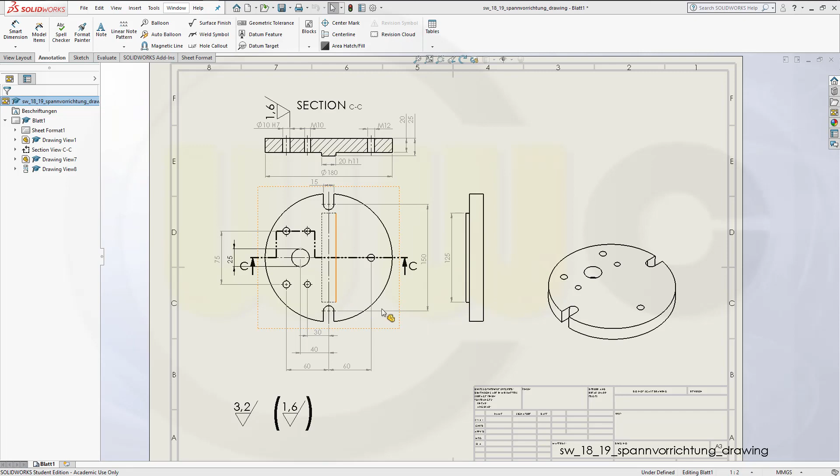So let's start with our assembly and go to File and Make Drawing from Assembly. Select Drawing, go for A3 and OK. Now I've got a front view. I could drag this here, but I will get problems if I later want to add a projected view - it will not be aligned, so I'll do it a different way.

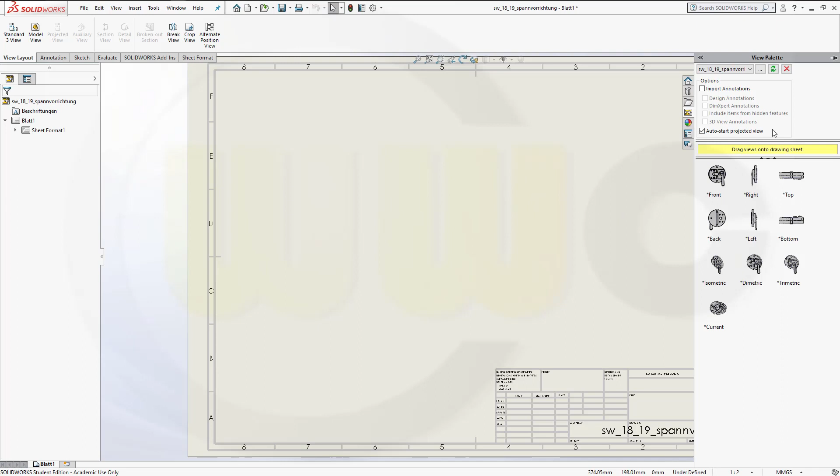I will just close this and go to Model View, browse to my assembly, open it and put it right there. Okay, and then I see the projection angle is wrong, so just confirm.

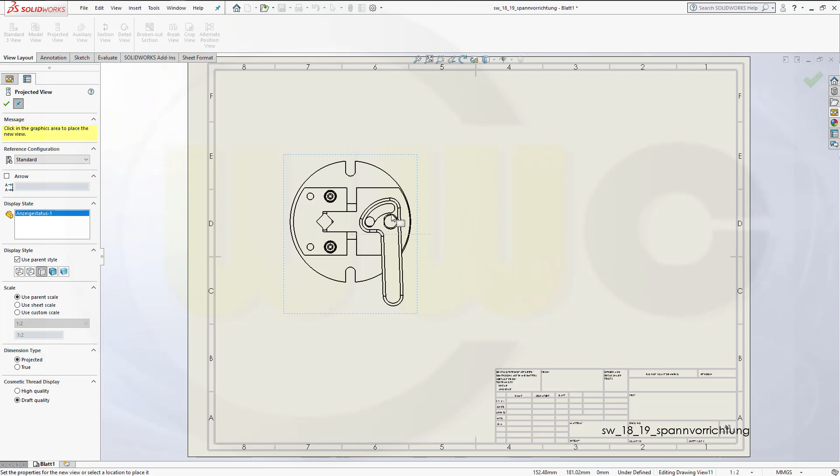Go to sheet format, right click, go to properties and switch from third to first angle, apply changes. Now if I go for projected view, it's aligned and it's okay.

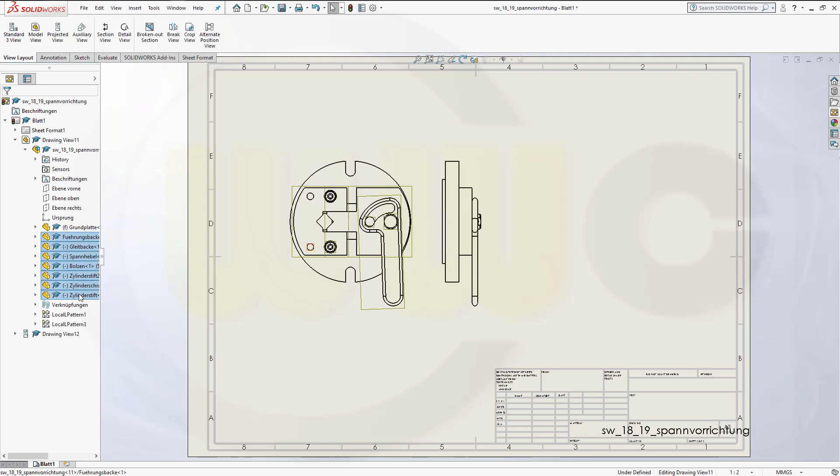Now in order to just see the ground plate, go to drawing view 11 and just hide those components, including, of course, those pattern ones. Same for the second one - hide these, and here as well.

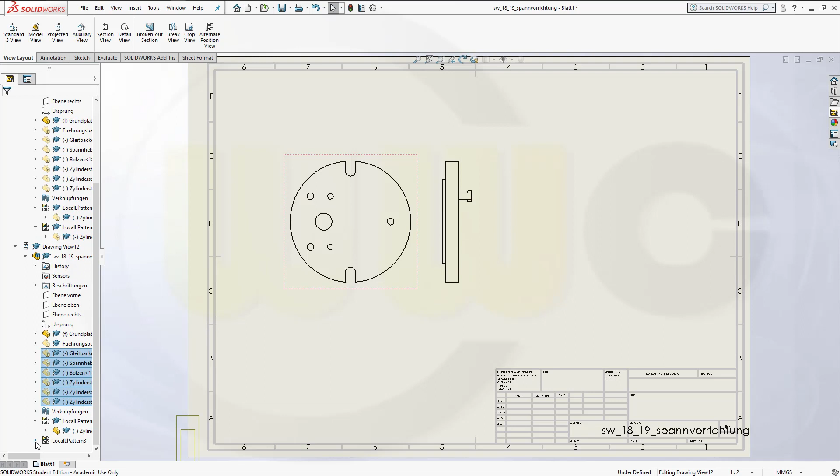Hide components. Great. I will need an ISO view and I want to have a section view. Maybe let's start with that ISO view, so go to Model View.

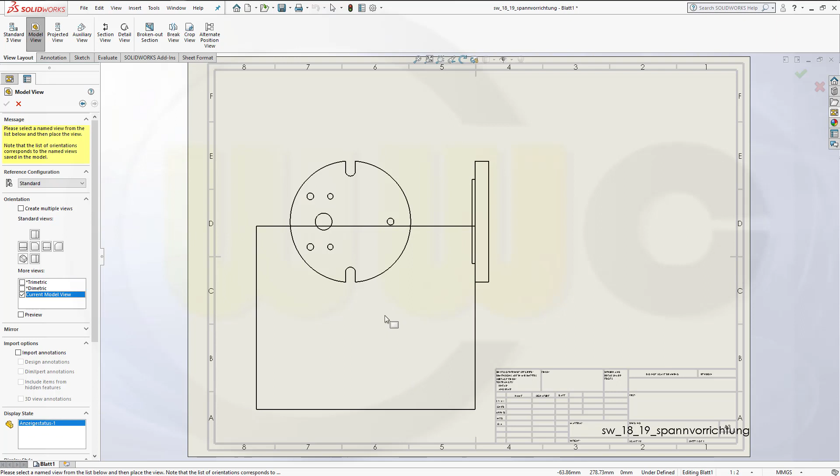That should be, or is it? No, go to Browse, go to your Assembly, open, and I want an isometric or current model view. Let's see, what's my current model view? I'll go for trimetric, go for preview. No, the current model view would be, that's more like it.

Yeah, okay, and confirm. Now again, just hide all those components you don't want to see. Of course, you could hide those components in the assembly as well. Right click, show hide, hide component, and I got my ISO view.

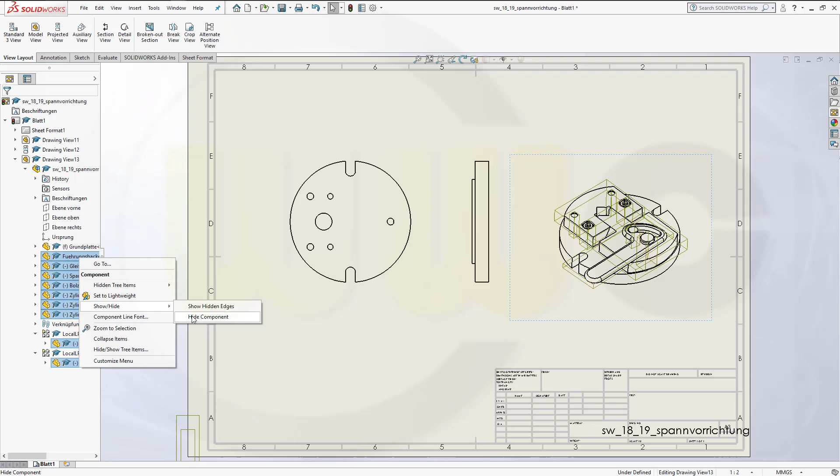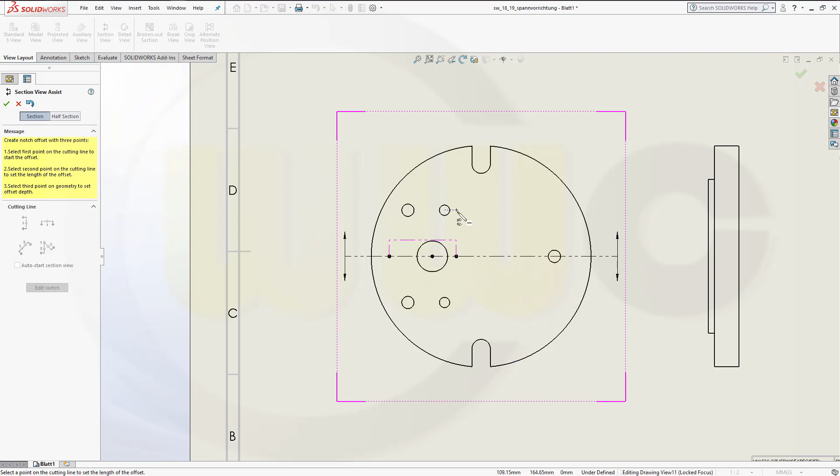Now for my section view, I need section view. So zoom in and go for horizontal, select one center point, then go for notch offset, like this and like that, and then put it right there, confirm. Let's go for auto hatching and OK, and move it up there and confirm.

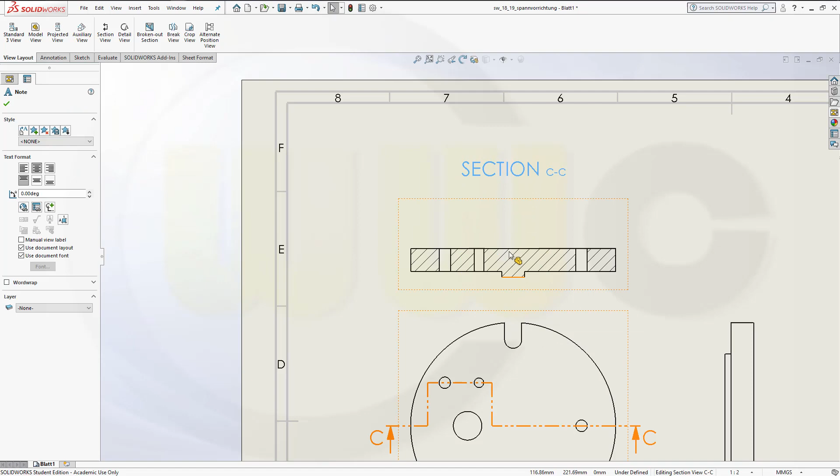Now let's move this up and this one up as well, maybe like that. Let's take a look here, should be okay.

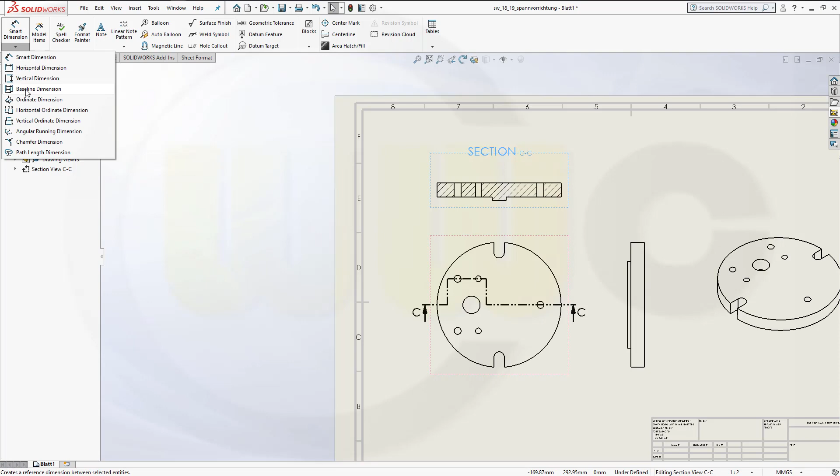Now for my dimensions, go to annotations and go to Smart Dimension, or you could go for a baseline dimension, and this should go from that center point to this center point, that center point, and this center point, but that didn't work out.

So let's undo this and make first center marks - one here, one there, here, here, here, here, over there, and there. Confirm, and now go for baseline dimension.

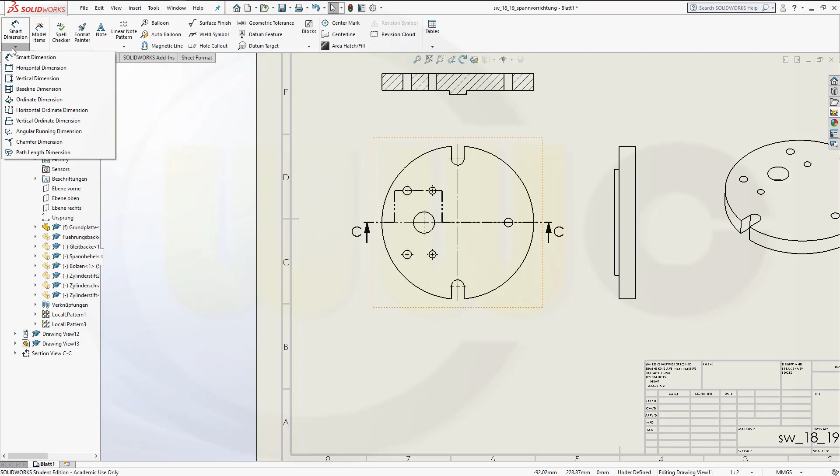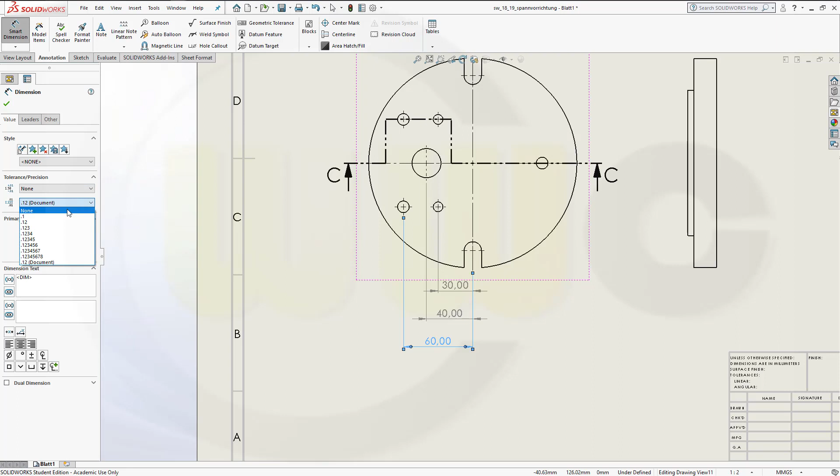Now you could maybe select this one, that one, this one, that one, and I don't want these, and that's kind of odd. You have to do it separately for those as well.

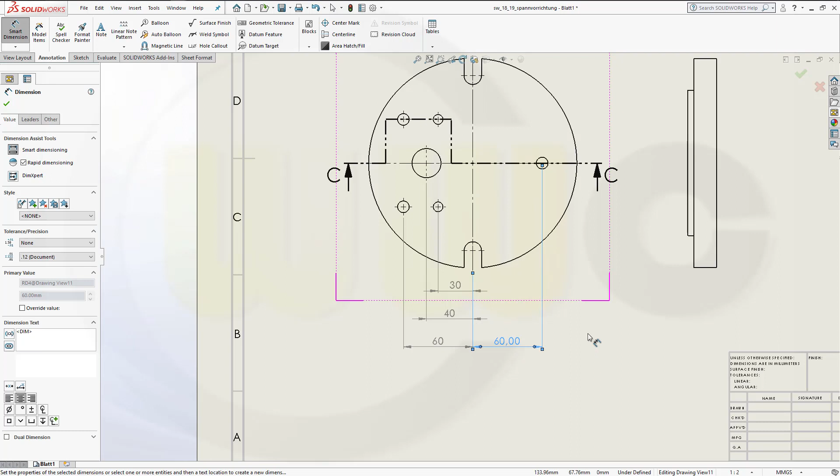Next one would be from this one to that one. Let's align it like this. Okay. I need one dimension from this circle to that circle, that one. And let's make this one over here as well, from this line to that line, like that.

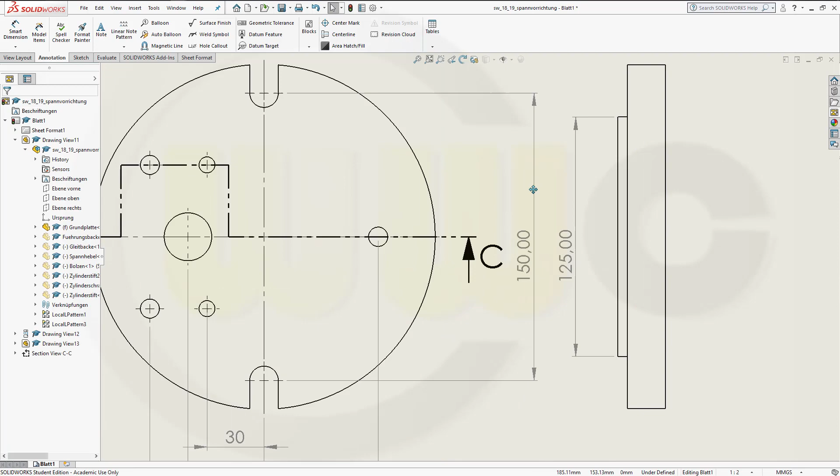Now let's see if we can do them all together. Okay, and change to 0. That works. And move it over here.

Next dimension is from this circle to that circle, that's 75. And again, none. And it will always be dragged back. Now you see you could align those. It snaps. Okay.

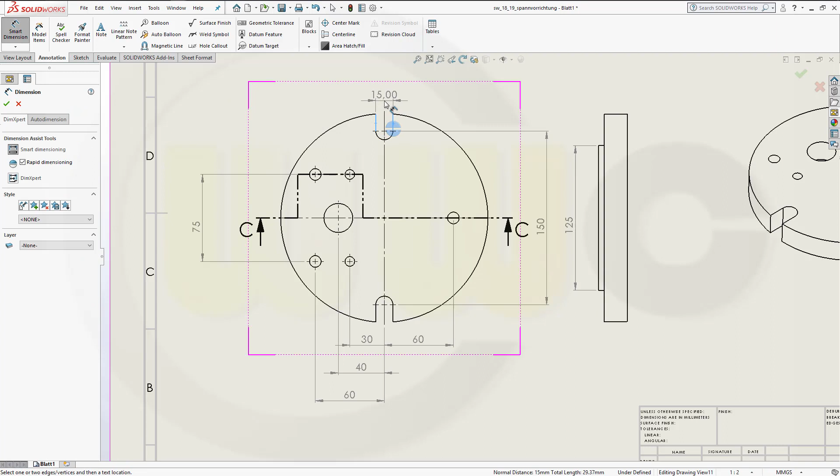Now another one here, 15, again it's just with no precision, more than 0. So next one would be this one, and if you drag it like this, you get it vertical aligned, and again precision none. Okay, let's drag this over here.

Let's take a look. Oh, hidden lines are missing here, so let's go for hidden lines. Not here, but select the view and go for hidden lines visible.

So these are without. Don't use parent style. Go for this one, and same here. Don't use parent style, but this one.

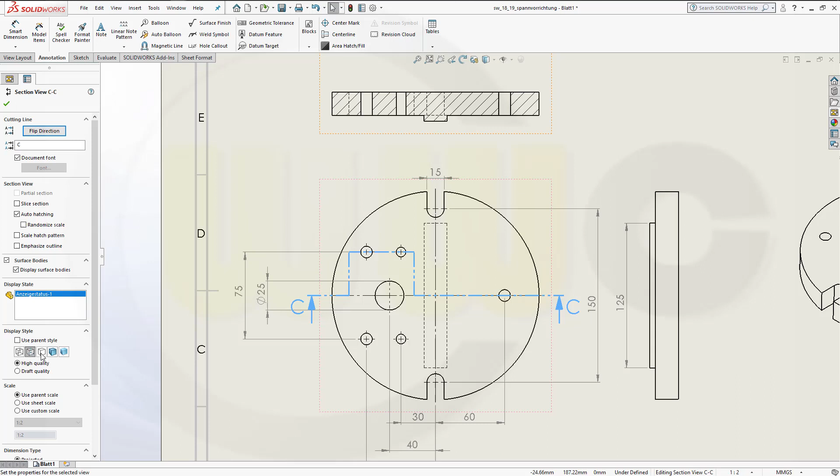Okay, I need a center line here, so go for center line like this, and too many center lines. I need only that one in the middle.

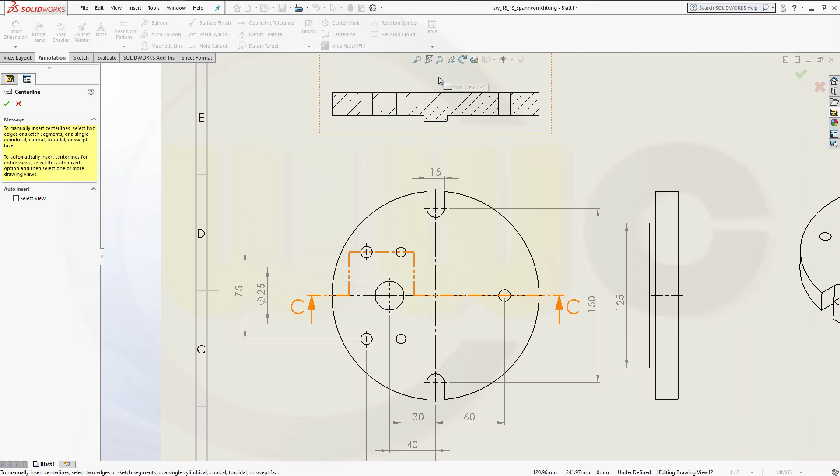Center line here, that's okay, and remove this one.

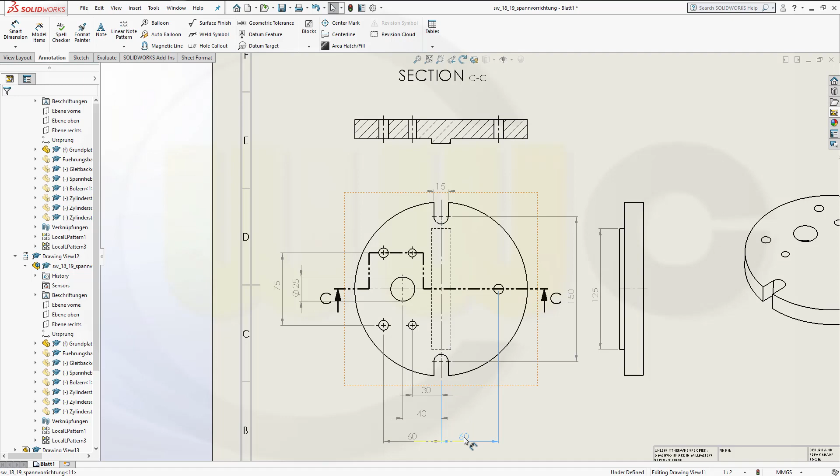So what's next? The one 150. I got this one. I got those. Let's move this back down. That's kind of odd because it always jumps and refreshes somehow.

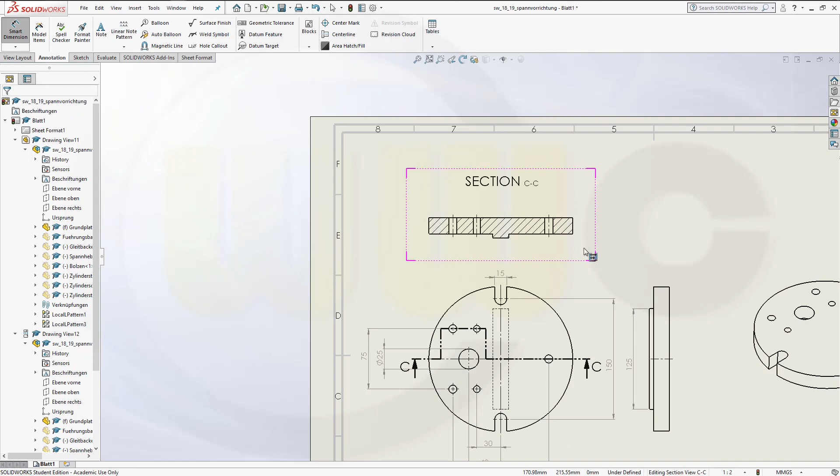Now smart dimension, or let's say baseline dimension. Zoom in from this line to that line to this one, and that's really annoying.

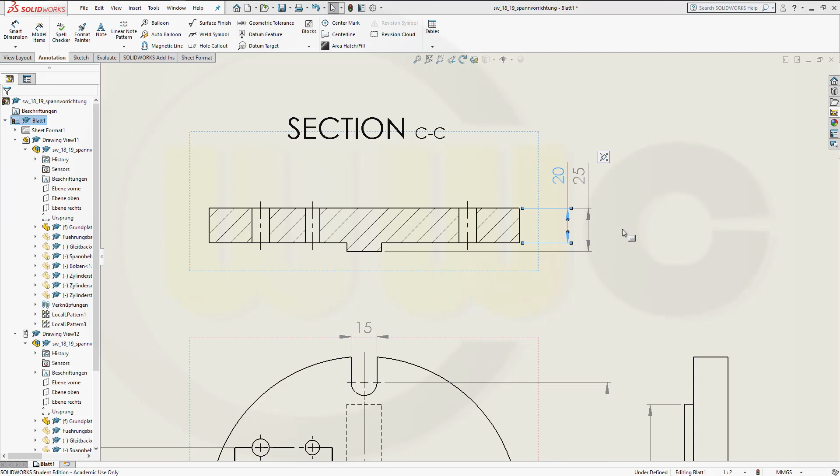So, 0, move this up, move that one up as well. Okay, another one here.

And there I would need a symbol, so click here, go for diameter, and again not the document precision but 0.

I need one here, and there I would need a fake one here and a fake one there, because there are no threads, since that part wasn't modeled with SolidWorks.

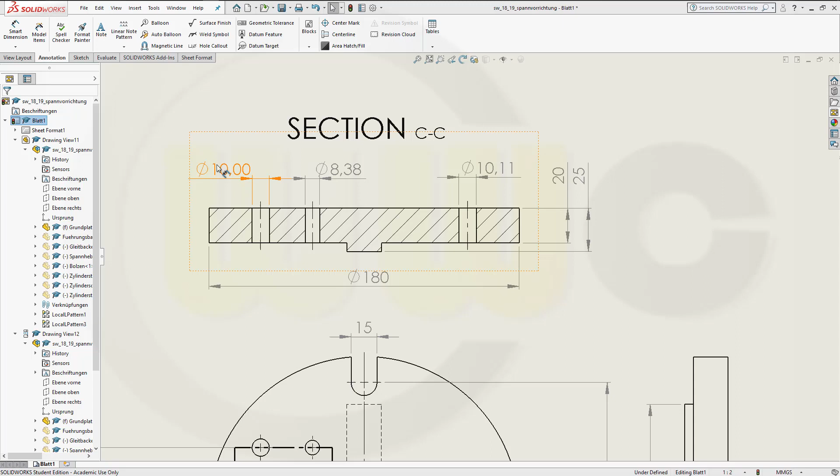Now here I need a fit, so go to fit, and that one would be, yeah, H7.

Okay, but it should be aligned like this.

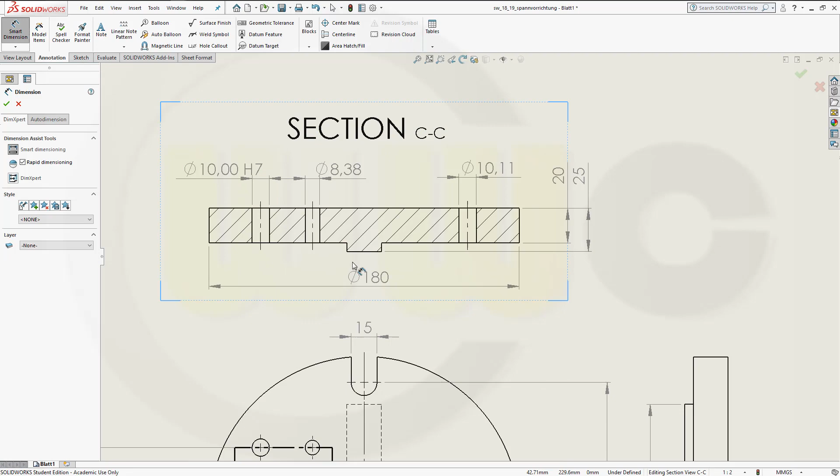We'll need another one here, so go there, put it here, and again precision should be none, and I will need another fit. In this case I think it's that one, and I should go for H11.

Okay, and again like this. Nice.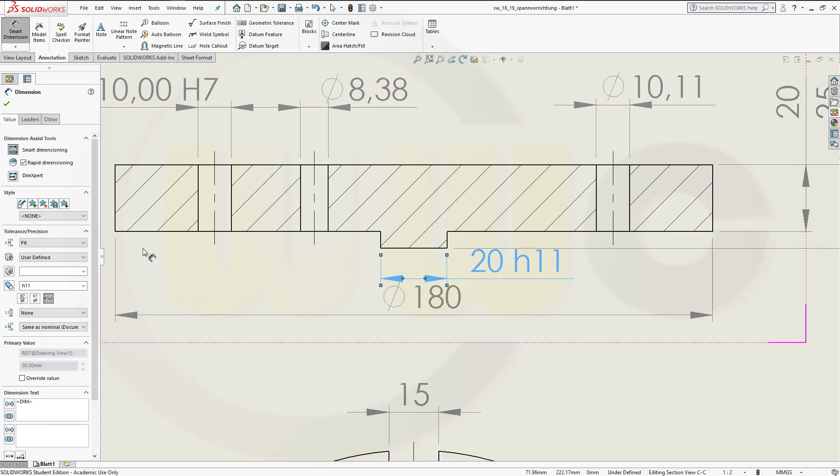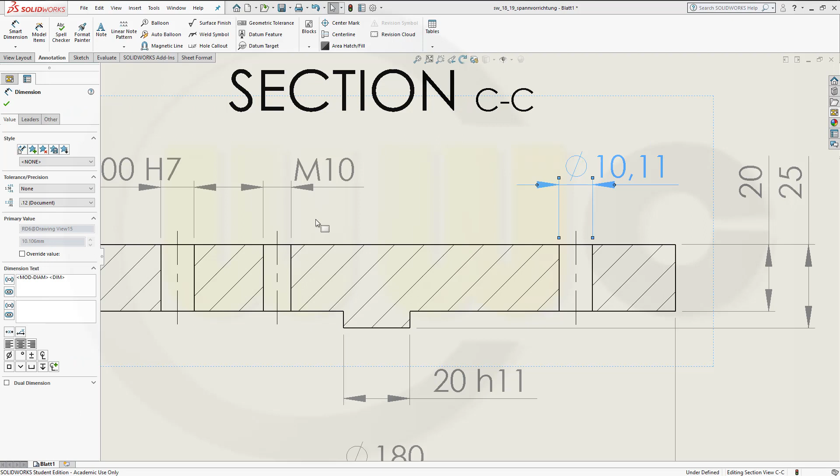Now in order to make these threads, just remove this, yes, and give it M10, and same here, remove that one and give it M12, and confirm.

So what's missing? Of course my surface finishing is missing, so let's draw this a little bit over here. So go to surface finish.

I need that without this one, I need that one, so okay. I need it with an angle.

I will go for multi-jog because it aligns better, and switch to straight line. Click here and drag it up and put it right there. And I need a value, and the value would be 1.6.

Okay, so that should be without that arrow, but that's not possible somehow. So I switch it to leader and straight leader. It's not quite aligned, so I will remove it and try it once more.

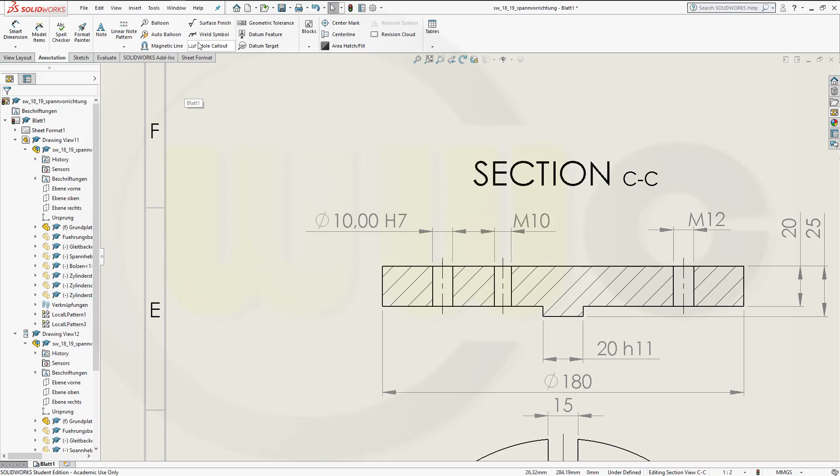Go for surface finish, put that 1.6 here, deselect this and make it with an angle. Go to straight and go to this one, just click that line and drag it up and like this. Okay, confirm.

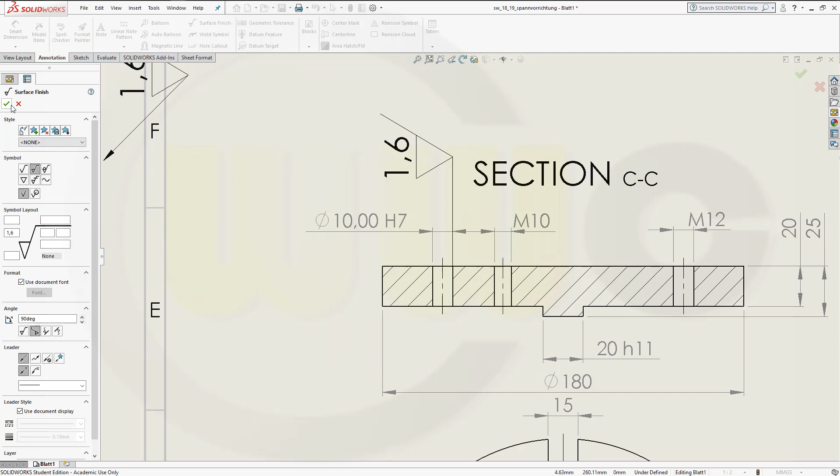Now just notice that precision is wrong, so change it to none. And I need two more down below. Surface finish. Again, this one.

No. Yes. And it should be aligned like this. And I need a no leader. Put it right there. Once, and another one over here.

Confirm. Now let's change that to 3.2 and this one to 1.6.

Now if you want to add parentheses, you have to trick it with text. So let's take a look, go for note.

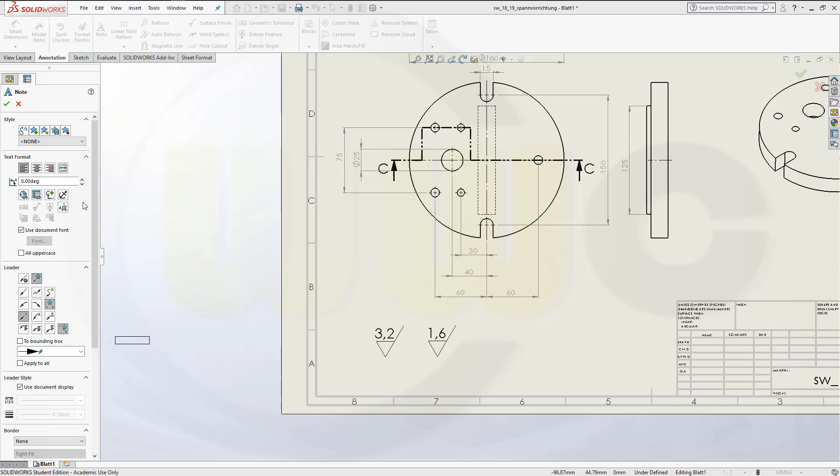Yeah, size should be, put it right there, maybe like this, and make it one like this, 1, 2, 3, 4 like that, and make it maybe 8 millimeter.

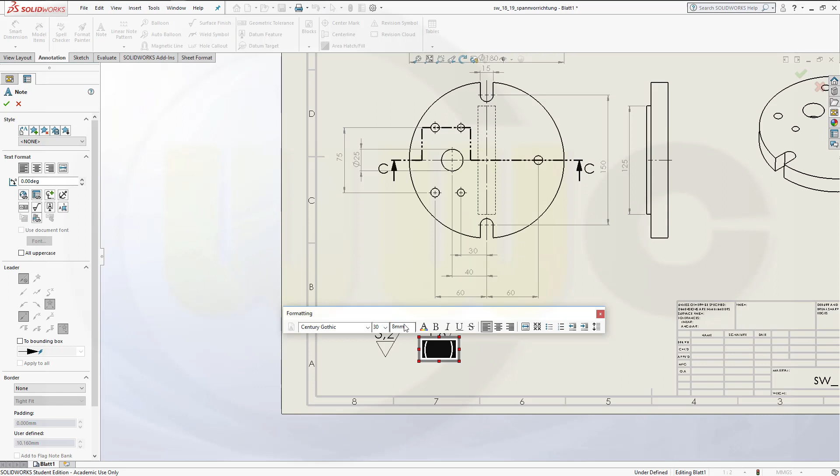But of course you have to do it like that and then go for 8 millimeter and confirm, and then move this up, and you might change this one to 10 millimeter and confirm. Yeah, and maybe like that.

And I'm done. So I hope you enjoyed this one.